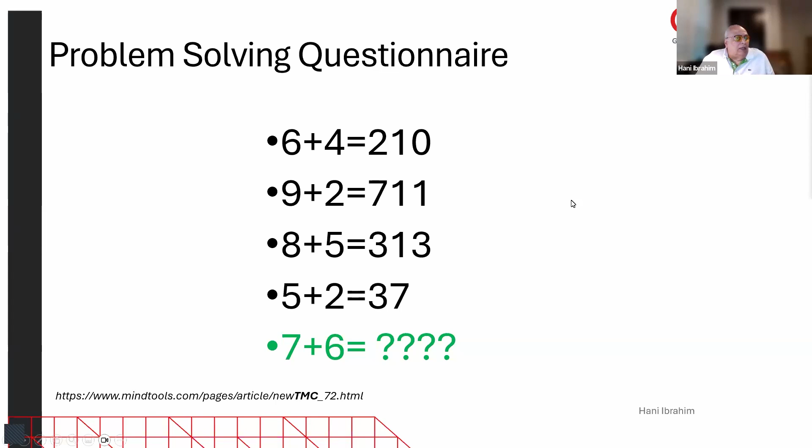So let's start with a bit of background on geothermal energy. Geothermal energy, as most of you know, is kind of married to the ring of fire, which is basically around all the continents, caused by plate movement and volcanoes in that area. So we have a few volcanoes and a few rifts between the continents, and that's where most of the hydrothermal wells originally started. You can find all of them on a web map, of course, but that's basically what it is.

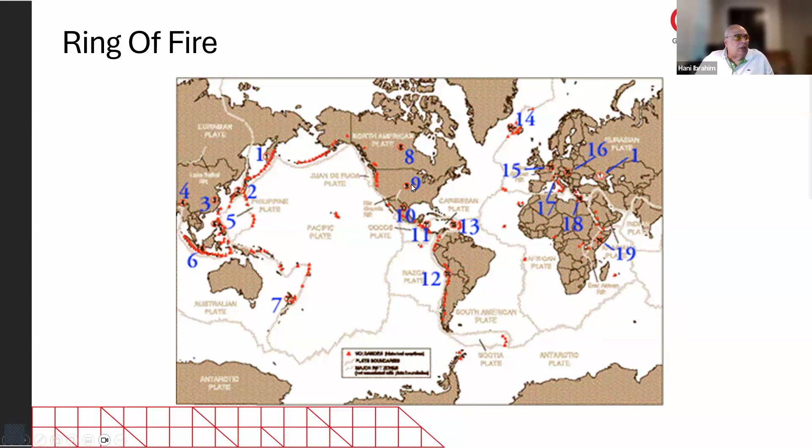Now, a group of people came up with this heat depth contour map, which is considered a new kind of concept for drilling geothermal wells, because, as we will discuss later on, we have new types called EGS and AGS and super hot rock and hot dry rock.

So they came up with this kind of heat map, saying that you can get 450 degrees C, and we'll talk later about why we're targeting that kind of temperature. This is above 800 degrees Fahrenheit. We can reach that temperature in places marked red here. So you can see a few of them, closer again to the volcanoes. At 5 to 7 kilometers, orange is a little bit more pronounced.

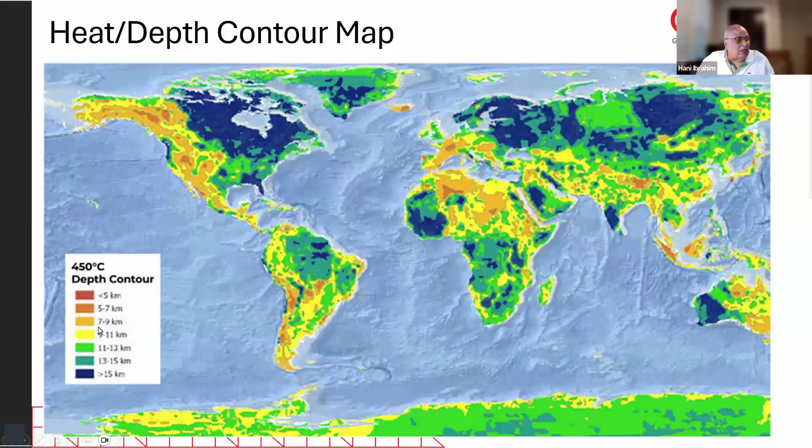And then at 7 to 9 kilometers, you find almost the west of the United States, west of Latin America, east of Latin America a little bit, the Middle East, Europe, Saudi of all places, and other places in India, Japan and Singapore. So what we're saying here is that we can reach that kind of temperature right now, but we don't have to reach 450 degrees. We can reach less than that at less depth. And this is 5 to 7 kilometers, which is about 15,000 to 20,000 feet.

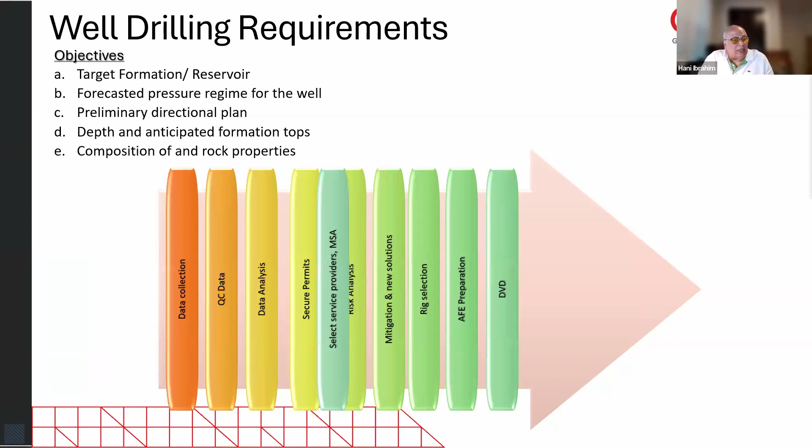So let's go back to the concept of well construction. What do you need from well construction? Well construction is complicated, and I'd like to give kudos to my friend John de Wardt, who started this idea that drilling is a system of systems, because everything is related to that system, and we need to look at everything we have. So we collect the data, and we have the formation. Then we study the data, QC it, analyze it, come up with the permit for the area, do the risk analysis meanwhile, and then look for any drilling issues you might see and how to mitigate them if you have new solutions.

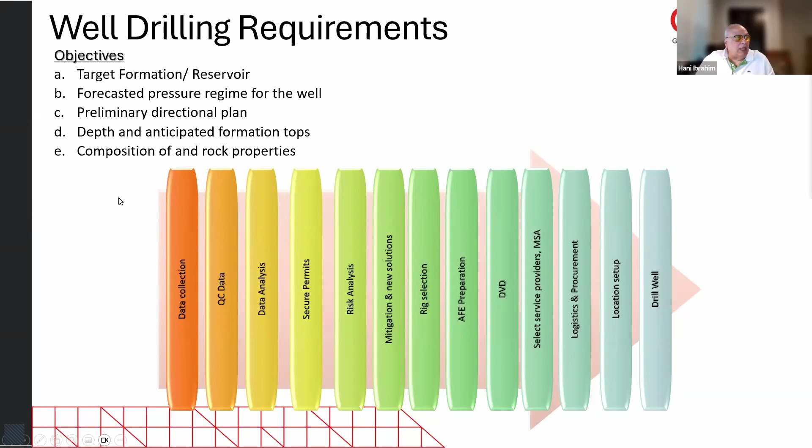Then we select the rig, we prepare the AFE, we prepare the drilling depth versus days. And then we select the service companies. We look into logistics and procurement, order our casing, our wellheads, and stuff like that. Then we look at the location, set it up, and start drilling the well. So it's not an easy task and it takes time, but before we start everything, we need to have the data. Data is important, and the geology is also important for us to know where we are.

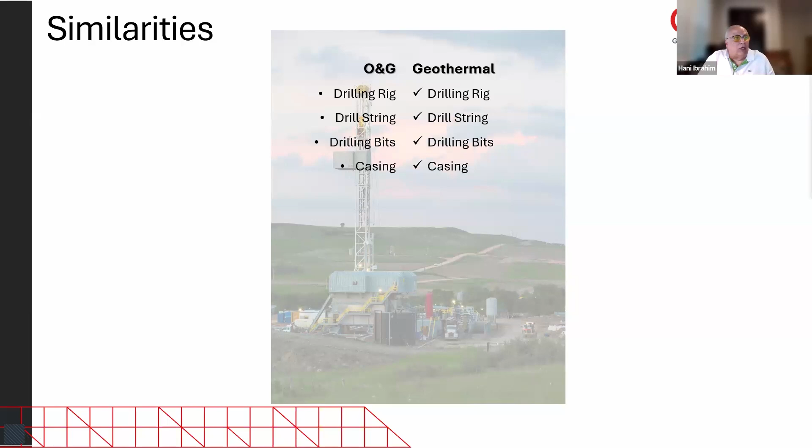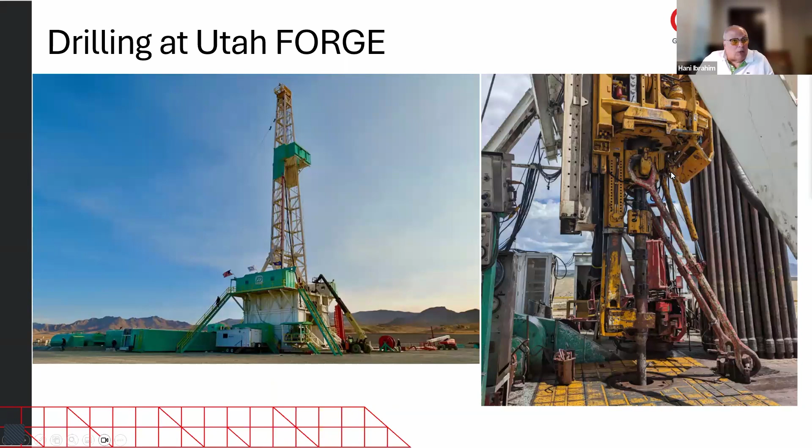You'll be surprised to see the similarities between the oil and gas industry and geothermal. Both use drilling rigs, drill string, bits, casing, etc. So you find a lot of similarities, and as proof of that, Utah FORGE, which is really a great testing ground for a lot of new technologies in geothermal, is using a regular rig, regular pipes, top drive, everything is the same.

Having said that, there are some dissimilarities or difficulties. Most of the drilling rigs right now in the States are catered to shale, unconventional. So they're reducing the size of the rigs and the number of rigs as well. But the capacity to run large casing deeper is one of the important parts of geothermal wells, because, as you will see later in the discussion, we need larger casing to produce more heat, and as such, you need to run that larger casing deeper.

So imagine if you run 9 5/8 casing, for instance, to about 15,000 feet. That's a lot of weight to carry by the mast, as well as the casing itself. It would be like 53.5 pounds per foot, which means a lot more than the regular capacity we have right now of 750 or so. I think it relates to about 1.2 million pounds to carry.

The casing itself needs a lot of looking at as well, because it's going to be deeper as we look into torque and drag. It's going to be exposed to high temperature for a longer time. There is a possibility of having H2S, there's a possibility of having CO2, and these basically cause corrosion and embrittlement to the steel.

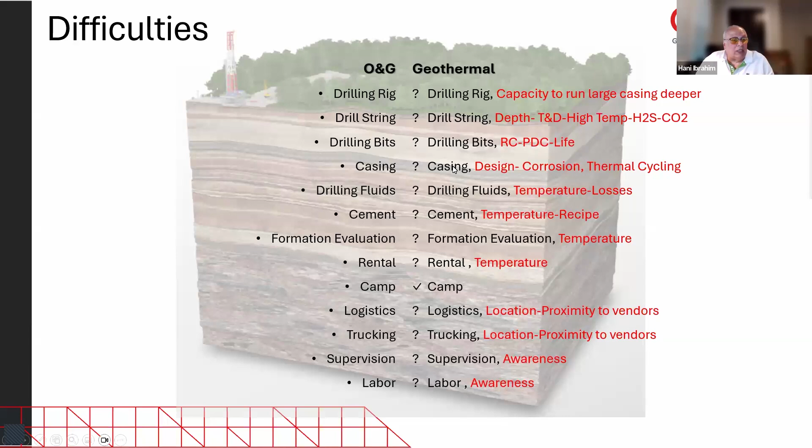And then supervision: a lot of people are not aware of geothermal wells and what kind of HSE issues they have. So you have to be aware of what they have in there.

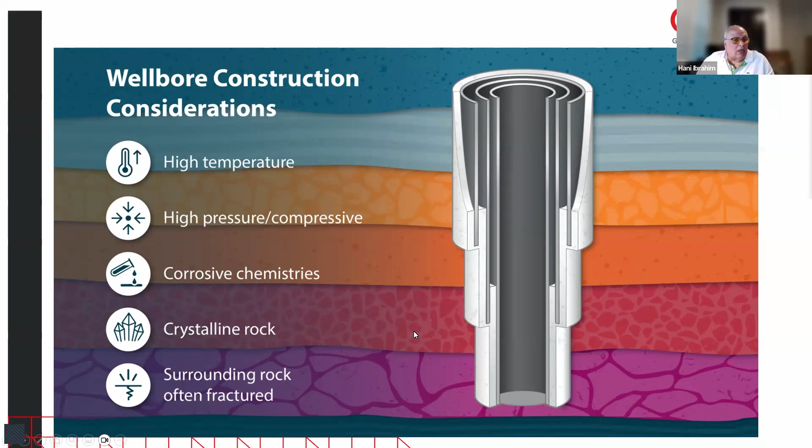So the considerations for well construction, basically, are the five main factors here: you're drilling in high temperatures; sometimes you have high pressure and compressive strength of the formation; there are corrosive liquids around; maybe crystalline rock, which is what we're mainly going to concentrate our efforts on, because you have granite or metamorphic rock, and it's hard to drill at a UCS of probably 50,000 psi or above; and then we have fractures included in the scheme of drilling the well.

So we have some learnings from the oil field which we can apply. Again, as my friend John was saying, it's a complicated system of systems. We need a holistic approach to any problem in the oil field, and the same for geothermal. We cannot think individually about what I can provide to the well construction if it's not affecting other people. Everything is affecting something else. So it's a domino effect, or a Jenga, if you like.

The reliability of the system, especially for EGS systems, which we're going to talk about a little more here, is dependent on consistent measurements. And measurements have been a bit hit and miss in the oil business as well. We don't have really accurate measurements for depth. We cannot really say where we are at the moment.

So it's all dependent on the rig and the measurements and the steel measurements, if you know that. And basically, we don't have a sensor. In the end, the sensor itself is going to be affected by the temperature, so we need to be careful about that.

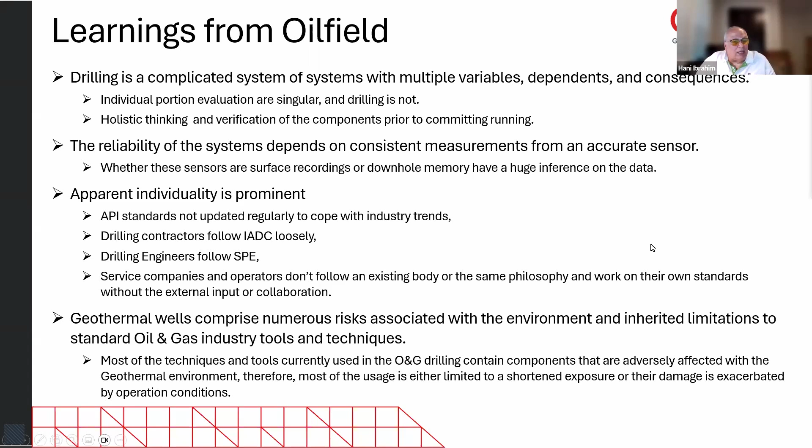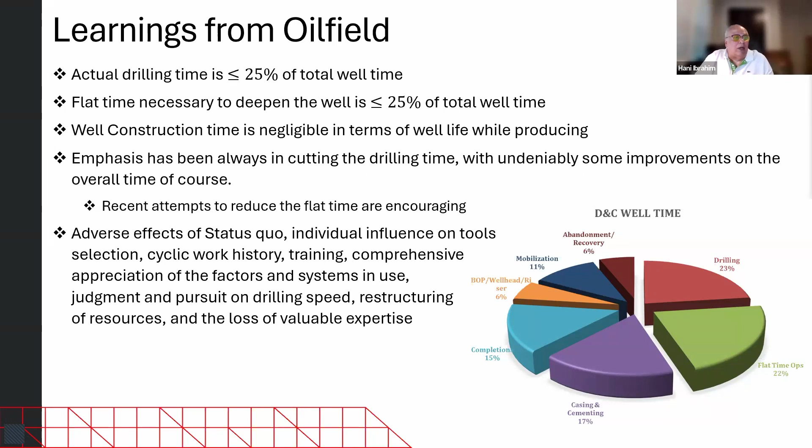But we have some kind of problems, when the tools provided in the oil and gas fields are concentrating on the oil and gas solutions and the environment they run in. And as such, we don't have exposure over to the geothermal world.

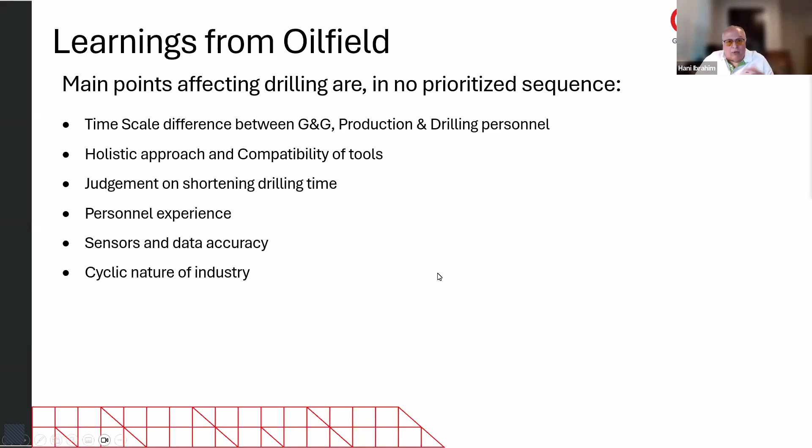Again, the sequence in oil and gas: the G&G guys are talking in centuries and eras and stuff like that. Production is looking at maybe 20 years of production life. Drilling people want to have things per day. I think we found out that if we don't really have a holistic approach to have the tools working with everything else, going back to the system of systems and the effect on everybody else, that is really essential and crucial in the success of drilling geothermal wells, and whatever learning we got from the oil field can still be valid in the geothermal field as well.

So we have some conceptions for the transition to the future. We need to accept a higher state of risk because of the temperature. Temperature is our frenemy, as I like to call it. It's our friend and it's our enemy at the same time. At a certain level, you cannot run tools, you cannot run things you want to run in a well because you're limited to the temperature envelope of that tool. However, as you can see later on here, the higher the temperature, the better the return on your investment. So we'd like to operate in a higher temperature environment.

Planning is really important because you need to know exactly where you're going for the tools. Identify the performance from the past wells, bring in some new equipment or adapt some of the existing equipment to try to work in that kind of extreme environment. It's kind of expensive if you really follow some of the practices you had in the past without really thinking about the heat or the component of the well, which is basically the rock, very hard rock to drill. I think we need a lot of brain power and input on the mitigation of all the problems that we might have. Again, the damage is happening because of a few things: temperature to start with, formation strength, and abrasiveness of the granite and basalt.

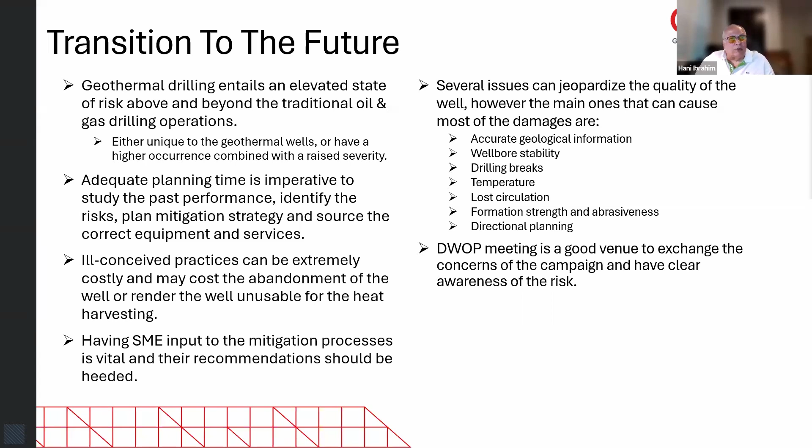So I think just following again the oil and gas, the DWOP or drilling well on paper is a very good practice to bring everybody together, all the stakeholders, to really look at things from their own perspective and share that with everybody at the same time. There is a critical path on what we need right now, because sometimes you need this information, or you need this tool right away to improve the performance, but also show that the performance is replicated and can be dependable in creating future wells.

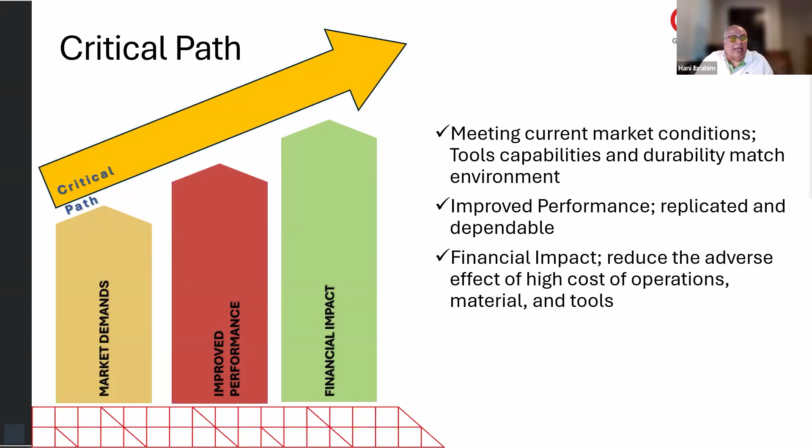But also in the meantime, we would like to have the geothermal industry attractive to the financial world, so they can invest more and more into geothermal and reach a level of investment like the oil and gas have, or enjoy, should I say.

So looking back at the oil and gas as well, we have oil rigs here. This is from 2000 to the year 2015. You look at the number of rigs here. It's below the 500 level until you reach '08, and then started higher and higher to about 1,500 rigs in 2014 or 2015, and then started to drop again. Was that a bad thing or a good thing? We'll see what we have here in a minute.

But I think we have all the involvement and innovation from the service companies and from the rig contractors, so that we have more robust tools that drill further and faster. We have rig automation. Connection time is shortened, handling after connections and after trips. Maintenance is automated on the rigs now, so that really minimizes the NPT for rig repairs and all that stuff.

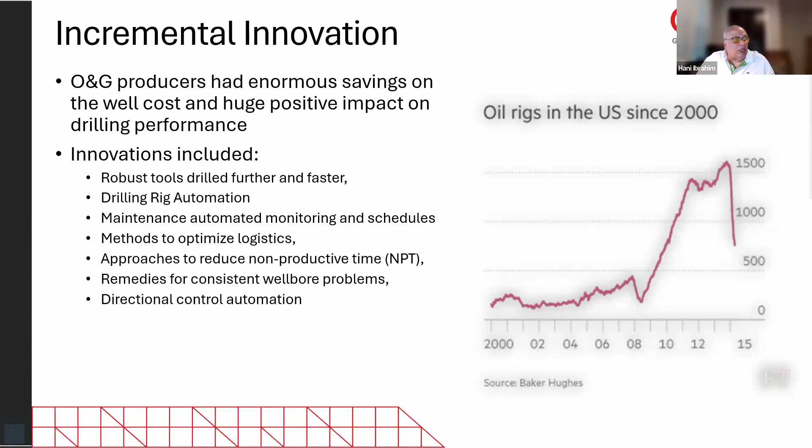We have a lot more remedies for correcting well problems. We have directional control in the rigs now, and automation and remote sensors and everything. So that helps us a lot. And basically what we see here, I gathered this data from the rigs. So you can see this is the wells per rig. And you can see even with a slowdown in the rig count, the number of wells per rig is increasing. So the rigs are drilling well.

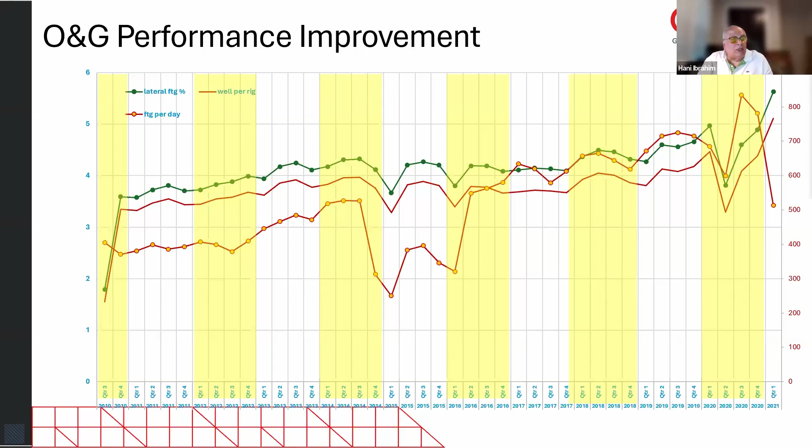Then the footage per day and the lateral footage in particular are increasing in general. That tells us a few things here. That tells us basically we have better tools. We drill more factory-like wells, if you like, and you get that into a standard optimization system. So you improve and you carry on improving every time you do the well.

But I'm trying to offer you something new here a little bit. The Stone Age invented the wheel. This luggage carrier was invented in the 18th century. It took about 19 centuries to come up with a suitcase or bag on wheels. And everybody's using that now, and nobody thinks about it. The wheel was invented 3500 years BC, and this in the 18th century. How come nobody thought about this?

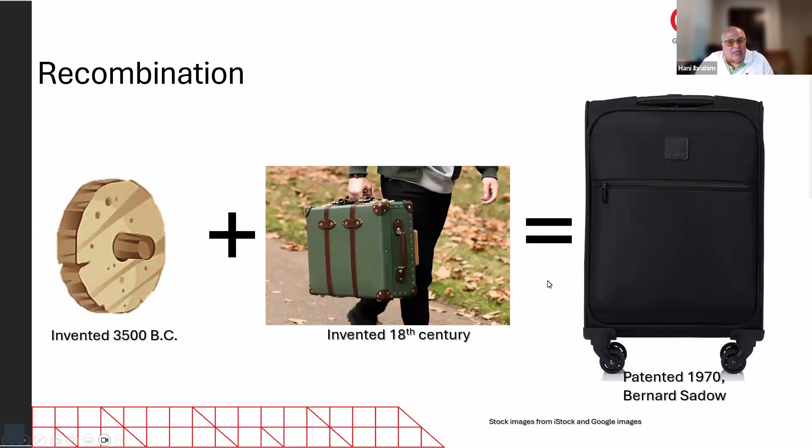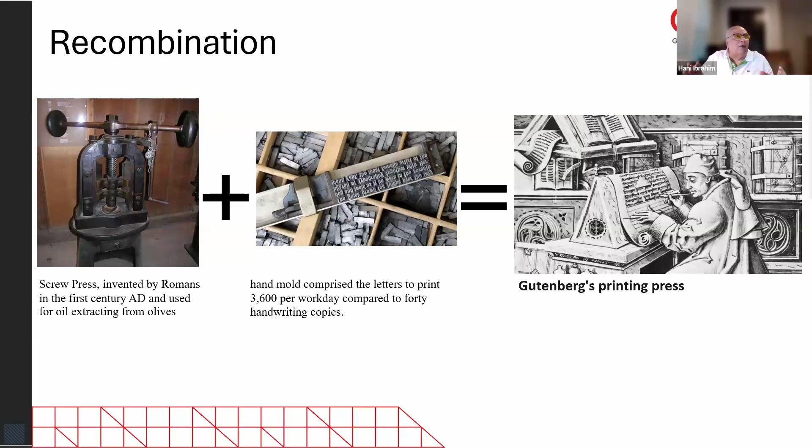This is what we call recombination. I think it's a great idea to have that in our thinking. Another example is the Gutenberg press. It took some time. A very long time ago we had this mold holding the letters that led to the printing press of Gutenberg, which nobody now looks at as something weird or different, but it's all recombination. So what I'm preaching here is trying to get everybody to use an idea from another field or another world, and combine it with what we have here to come up with a good solution for geothermal wells.

So, as I said, we have a few geothermal well types, if you like. The older types were, as an example, in The Geysers here in the western USA. Basically, these are what we call hydrothermal wells. So you drill the well to an aquifer, and once you reach that aquifer, you set a liner, a slotted liner in most cases, and produce from that. And it depends on the quantity of water, or steam, still in that aquifer. And typically they have higher temperatures, 400 degrees Celsius or so.

So it's a really good kind of investment in power generation. However, again, it depends on the size of the water aquifer, how much we have in there. And they've been trying to improve that quality, if the wells drop down or the water content drops down, by drilling some wells here and injecting water into these. So there comes that injection water here. And basically you get the heat out and you turn a turbine, and that will give you the traditional

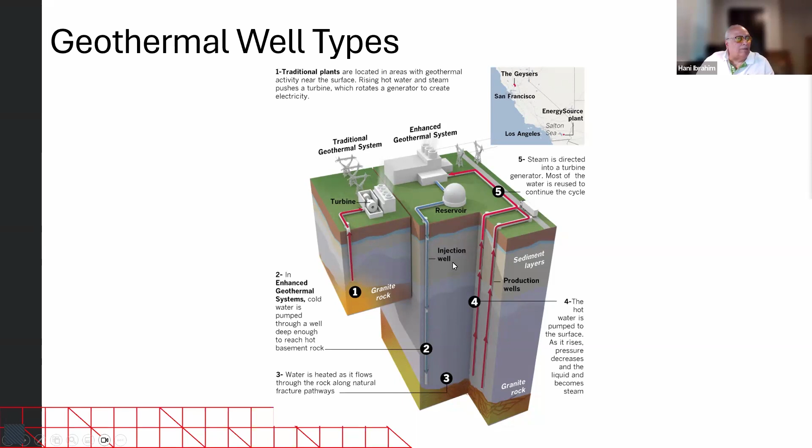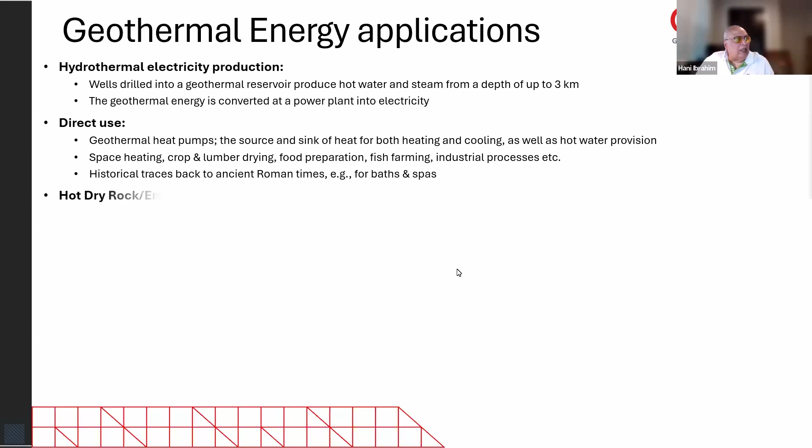So having said that, we have kind of categorized the geothermal applications. As we said, there is hydrothermal, which is the traditional conventional way it used to be in the past. The direct use, which is basically in Europe more than here. We have a lot of space heating and kind of working with that. Japan as well has a lot of hot spas and stuff like that, which they really like and keep. The last three ones here are really new types.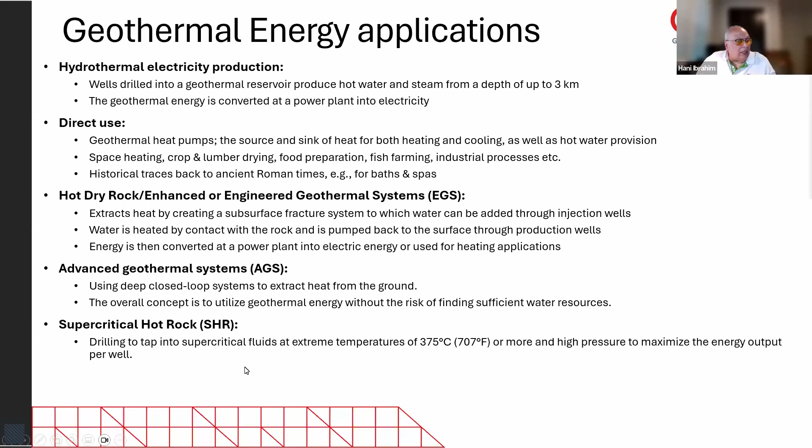So we're talking about the hot dry rock enhanced engineered geothermal, what we call EGS. So basically, as I said, pumping into a subsurface fracture system without having the aquifer in there, and you heat the water by contact with the rock, and then pump it back to the surface. The AGS, as I said, uses the single monobore to basically pump water outside the tubing and retrieve the heat inside the insulated tubing. And then the top part here is the supercritical hot rock, which we call SHR, and the temperature in these is above 375 Celsius, or 700 degrees Fahrenheit.

So why are we going for the high temperature? We're going for the high temperature because basically, when you see this curve here, these are the production per well. And you see the LCOE, which is basically levelized cost of electricity or energy, is dropping down fast with the amount of production from the well. So if you produce about 30 megawatts per well, that will give you less than $30 per megawatt production, which again is where the profit comes from.

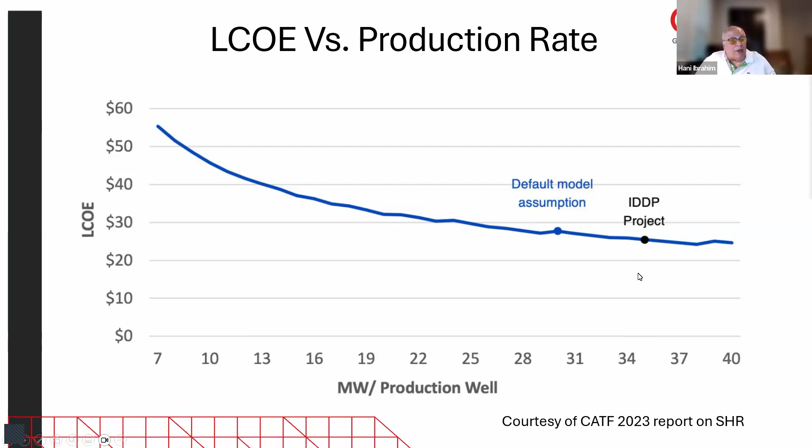The IDDP project in Iceland actually reached about 25, and the production was high, about 35 or 36 megawatts per well. So the amount of production coming from that is a better way to produce and to get return on your money.

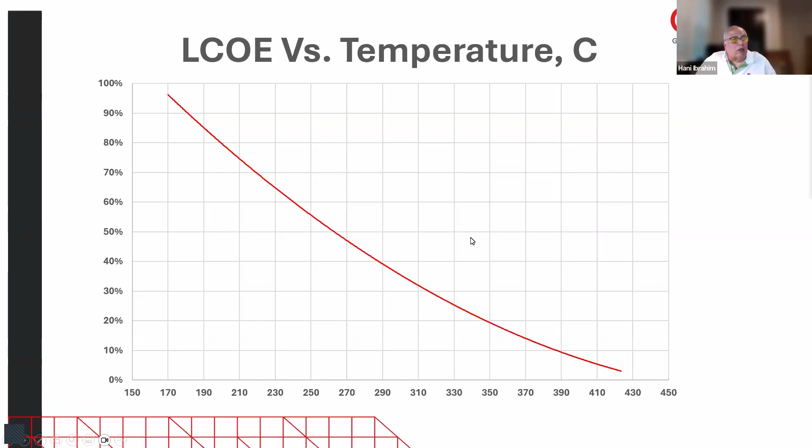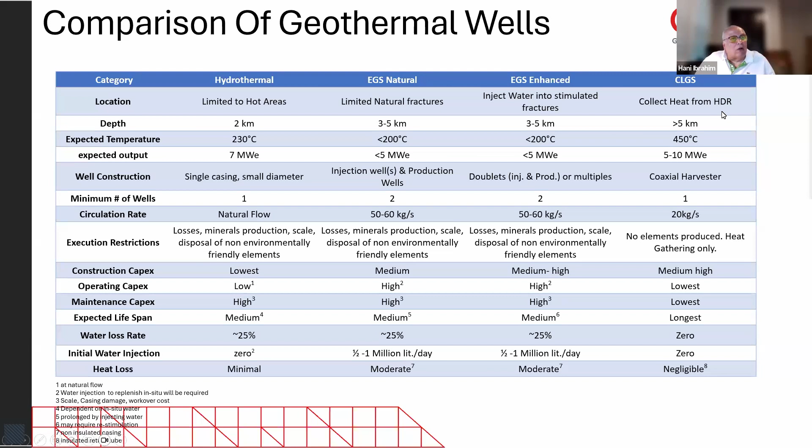So that's why we're going for the hotter rock or the deeper wells. This is a busy slide, I don't want to read it all, but I'm trying to show you the different types of geothermal wells here. There's hydrothermal, which we talked about, the EGS natural, and the EGS enhanced, which pushes water from outside and tries to fracture the rock, stimulated fractures. EGS natural would be limited natural fractures already existing in the rock, in hot areas where you have a hot aquifer. The closed loop collects heat from HDR, hot dry rock, or super hot rock.

So looking at the rock EGS, you're looking at creating a fracture network down there. That fracture network can be mostly natural fractures, or stimulated fractures. The idea here is to pump cold water or a working fluid down. Some people are using supercritical CO2 to do that, pumping through this open fracture system. That open fracture system gains heat from the rock and then goes back up to the second well, or production well, and then basically you have your power plant on top.

Some of the concepts involve stimulation of the rock, which basically means hydraulic fracturing. As such, we have seismic monitoring on most of the wells, just to try to see what kind of seismic events may happen while stimulating the well.

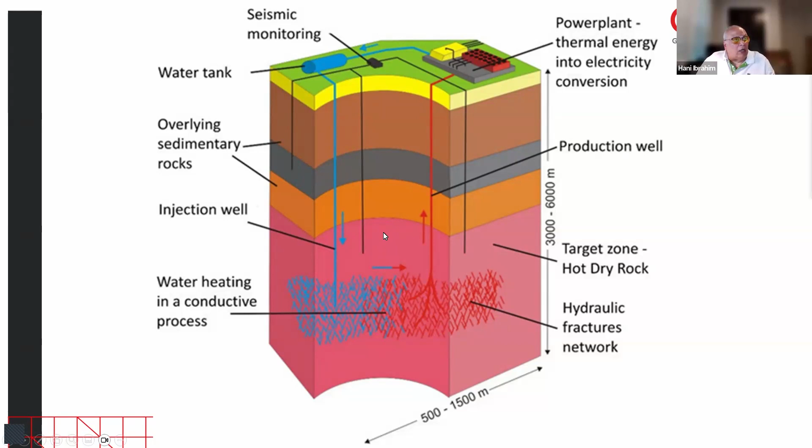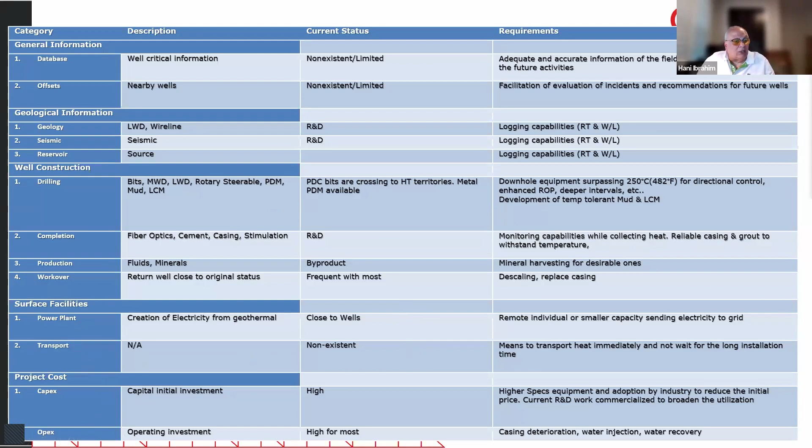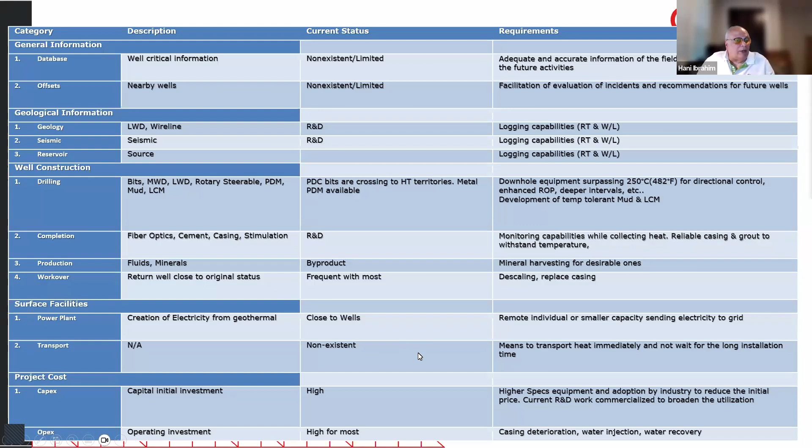Since this is a drilling discussion, I'm going to concentrate a bit on the drilling aspect. But there's a lot more here, because the power plant itself costs money. Transporting the heat is really non-existent at this time, because we cannot transfer heat via pipelines or anything available for oil and gas at the moment, and that creates a lot of problems. So that means you have to have the power plant close to the wells, and that's another area we need to explore to come up with a better plan.

So there's some development, some people trying to work on developing new ideas and concepts, and I'm going to share some with you. But before we do that, let's look at the geothermal focus really. We're all talking about this thin crust on top of the earth, we're not really going that deep.

Some wells have gone as deep as, I think this is the longest I could find, about 12 kilometers - the Kola Superdeep. I believe it was in the Russian Federation, and the KTB in Germany, about 9 kilometers - these are as deep as possible.

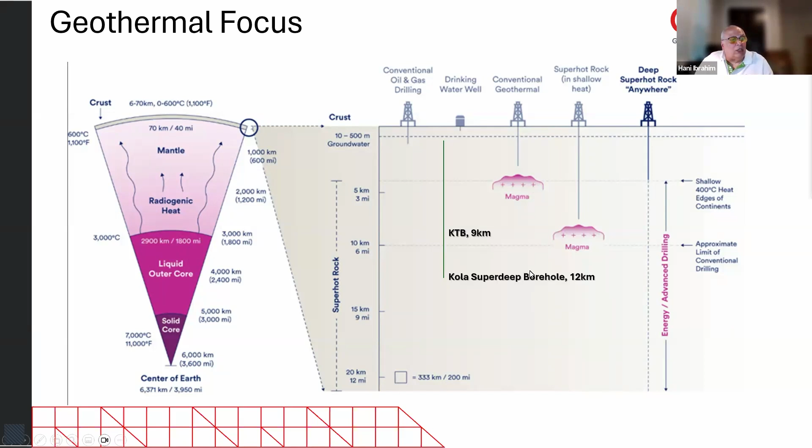But in order to reach really deep and get that heat from the liquid core, wherever it comes up, you're looking at wells drilling close to any magma, interrupting the mantle and going into the crust, getting closer to the crust, which basically means closer to a volcano to get that. So you're looking at wells drilled conventionally here. Super hot rock is basically trying to reach there, but to get really, really deep super hot rock anywhere, as per the map we just saw, we need tools and things to go beyond that.

One of them is the drill bit, of course. Everything hangs on a drill bit, since it's the first thing that meets the rock, or rubber meets the road, if you like. So we're looking at some people who have done a lot of work on the cutter types and the cutter shapes.

That way we can increase the weight on bit to drill through the granite and the high formations, high compressive strength formations we encounter while drilling in oil and gas. So that is important for us, but also what's important is the torque stability because we have a lot more vibration while drilling hard rock, of course.

The temperature, because while you're drilling, you're generating a lot of temperature at the localized contact between the cutters and the rock, but also you have hot temperature coming from the rock itself, so we have to compensate for that, and you have to cool the well and cool the bit, especially to get a higher penetration rate.

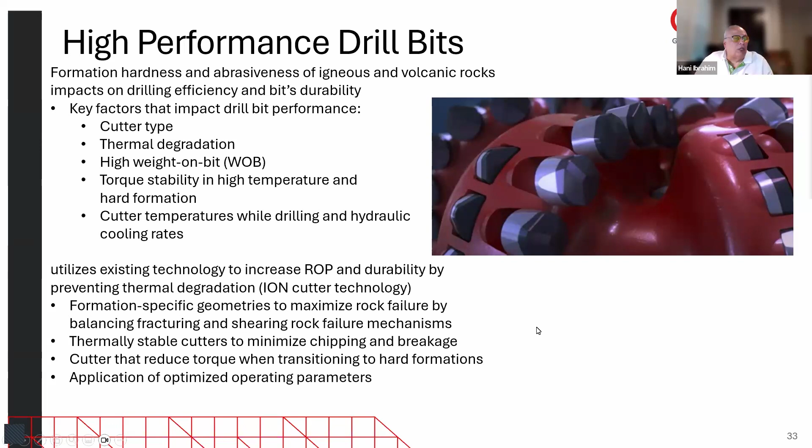And that's kind of what we're preaching here, not to do that. So it's a little bit of a change in mentality on how to approach the drilling of these hot rocks. This has been applied, and all these learnings are gonna turn out to be a great thing.

If you look at this Forge well, we drilled the previous well that was drilled so many years ago. This 16A was drilled about 3 years ago, and you have the record run for it. Basically, it's 742 feet for the bit, which, when you talk about oil and gas, is basically nothing. We're looking at 4,000 or 5,000 feet runs here.

But they have changed the drilling practices a little bit. We changed the weight on bit, the way we apply it. We have shaped cutters. They perform drill off tests to find out what's the right parameter to do this. These are the two important things here in my mind.

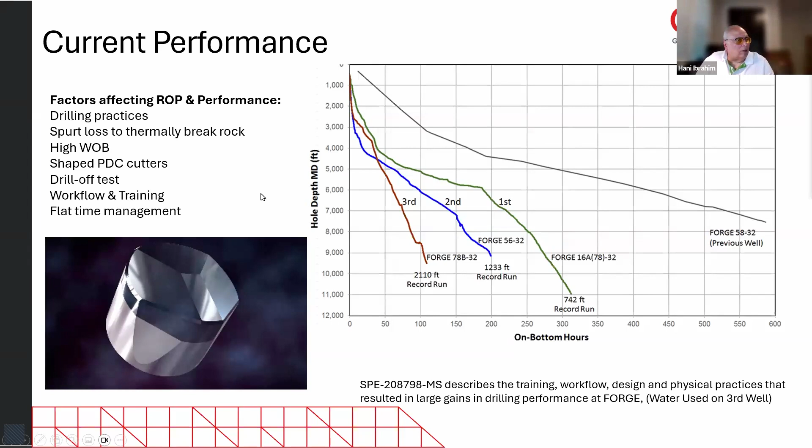So PDMs are another important part as well. The normal PDM has a lot of rubber lining on the stator and on the rotor, and basically that deteriorates with temperature, to say the least, but it also cannot handle all that. Even if you have the higher component of rubber or elastomer in there, I think it's HNBR they're using right now, that's a maximum of 175 degrees Celsius it can handle. And if we're looking at anything above 200 degrees Celsius, this is not applicable. It will chunk on you.

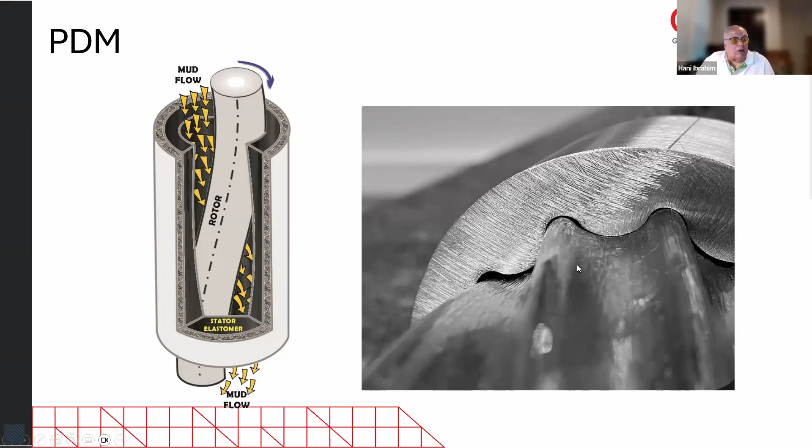So another approach was to use metal-to-metal motors. Metal motors, as you can see here, have no rubber components at all. So as such, they have the capability of running longer without having any issues for rubber deterioration. However, because of the close tolerance, you have to run very clean mud through this. So it's expected to have top-of-the-line mud cleaners and all the solids control equipment to help run a very clean mud so as not to affect this tight tolerance for the PDM.

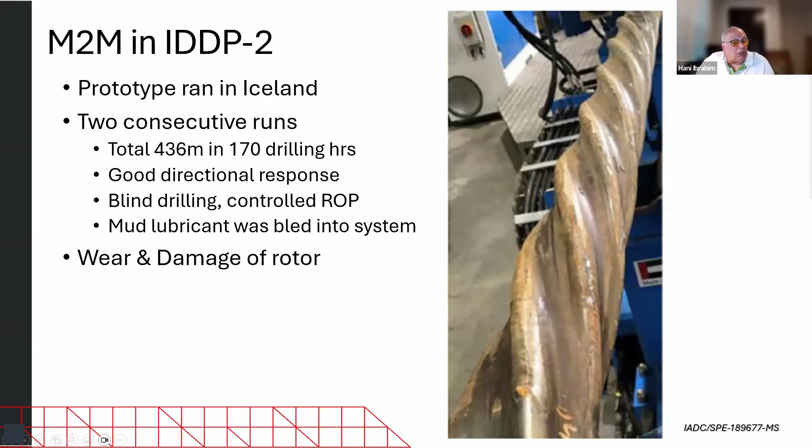So we have run the metal-to-metal motors in IDDP-2, which is the Iceland project here. And basically you can see on the rotor there's a lot of damage on the rotor here. You can see it visibly by your hand, and you can refer to it in this SPE paper as well.

Drilling fluids is really the bloodline of any drilling operation, and you have to have a good drilling fluid to counter a lot of the stuff we see in drilling regularly in oil and gas. However, because of the geothermal system requirements and limitations, we basically run aqueous fluids, which is basically water with minimum bentonite and gels. There's a lot of research going on to try to use new materials, but the thermal stability of most additives and chemicals is less than the required temperature of about 400 degrees Celsius. So we're still working with water-based mud. We still don't have any kind of solution for that for the time being.

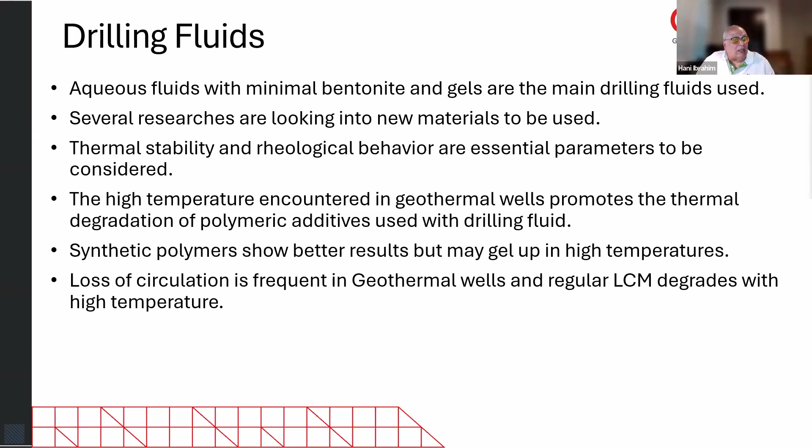There's lots of lost circulation in some geothermal wells. It's frequent, as I said. And basically, the regular LCM material degrades with high temperature. So we need to look at a good solution for that. So far, what we've been using is drilling, then cementing that zone, that thief zone, and then moving on afterwards.

Which brings us to cement, and cement is also a very important component in this equation. Portland cement and silica flour are traditionally used in high temperature wells for oil and gas, but they cannot really work well in geothermal wells because we have a lot of heat cycling between the setting of the casing and the cementing, and the water around it. Basically it deteriorates the cement to a point where you cannot really use it for anything, for the zonal isolation you're looking for.

So typically what we have right now is to add more retarders and friction reducers to offset the high temperature, or use a brand new type, calcium aluminate phosphate, or thermal shock resistant cement, TSRC. These are still a little commercial. We have some other types available commercially, but mostly it's lab testing from the national labs we have.

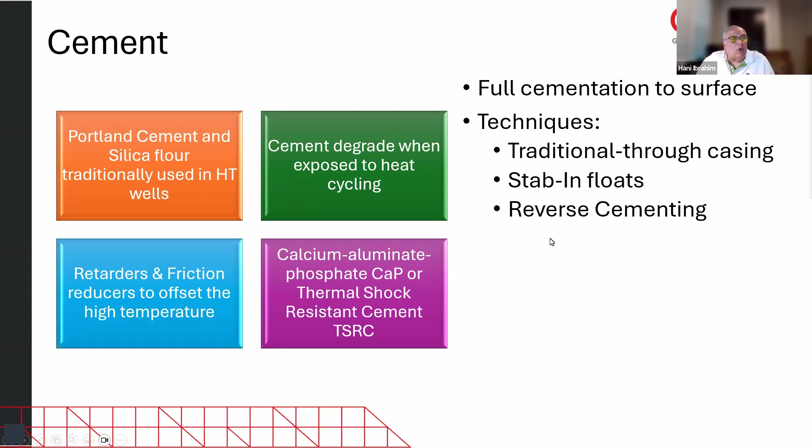MWD, we mentioned that the new EGS wells are going to be drilled with directional work. So this directional work is really important, and as such you need to know where you are, as far as measurements for the well, direction, and other things.

Formation and orientation, vibration - the MWD we currently have is basically 175 degrees Celsius maximum. Some vendors are looking at changing things. So what they wanted to do is an enclosed or encapsulated MWD component and have a nice way to cool the tool down inside that encapsulated equipment.

Which is called the Dewar vessel. So they go through this factor here: when they start with 300 degrees, they control a valve and it evaporates, getting a lot of zeolite in a system to cool it down, just like your AC. If you think about it, like your AC at home, it runs a refrigerant to really cool the area around you, and this is basically what it is.

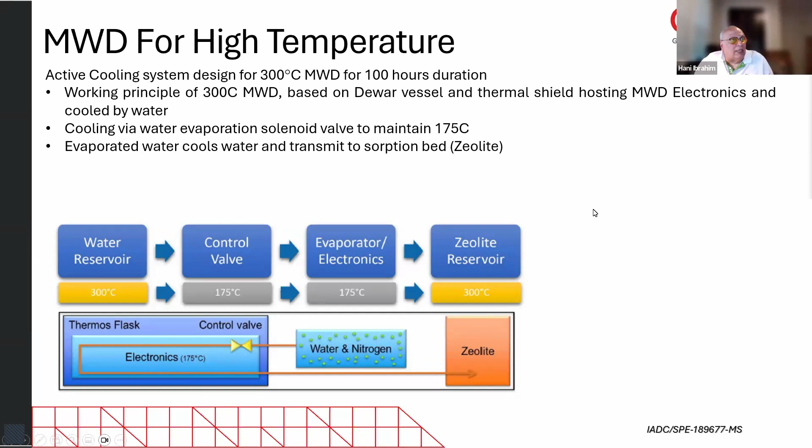It's kind of a reservoir that impulses things into the thermos flask, and then the zeolite cools down the electronics and maintains the 175 C temperature, which is the maximum for these electronics. You can read all about it in this SPE paper here. However, unfortunately, this has not been used at all - it's been shelved and I think discarded afterwards.

So in conclusion, what we're looking at here, what we need to do to drill into the 350 degrees C or more: we need an AC rig with a hoisting capacity above 1,000,000 pounds to manage the heavy casing. We need high temperature BOPs - something we didn't talk about, but all the elastomers in BOPs are rated for 300 Fahrenheit only, so 150 degrees Celsius.

We need corrosion resistant casing. Perhaps we don't need to go to exotic materials like titanium and molybdenum, but we can use something else with modification. We need high temperature drilling fluids. We need high temperature MWD and LWD to help us locate where we are and really explore this EGS system as much as we can.

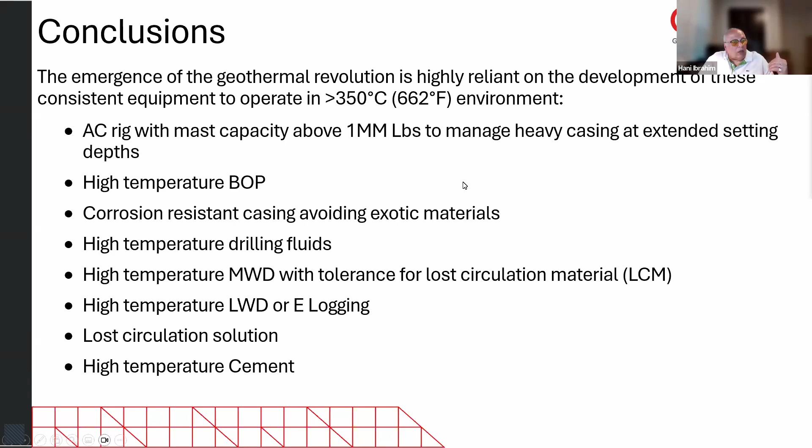Lost circulation is an issue, and cement is an issue of course. So we need to sort all this out to be able to get into really the geothermal kind of performance that we're looking at from oil and gas.

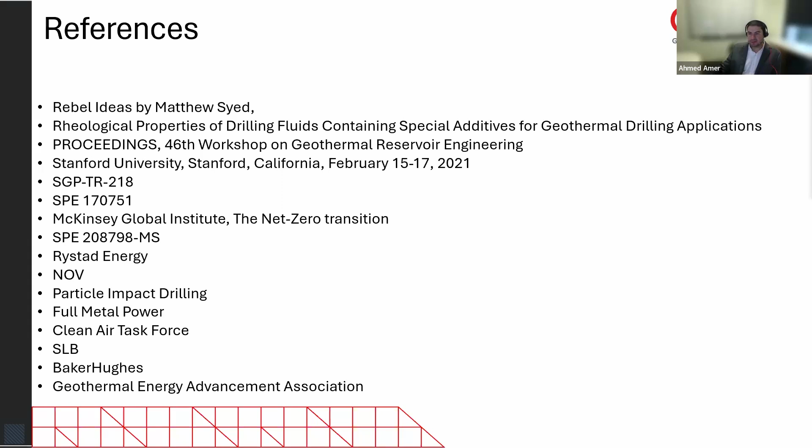All right. So there is another question. It's talking about the wells that have been drilled in Iceland and Japan, with temperatures exceeding 500 degrees Celsius. And what's the difference in methodology there versus what you're looking at? Well, the wells drilled in Japan to about 500 degrees Celsius took over 500 days to drill. So in looking at the cost versus value, you're trying to look into something equitable, right? So you cannot really use the same concept they have. This has been a really long well to drill, because of the time it took them to run this MWD and pull it out after every run. So that took a long time, of course. And then they burned a few MWDs, should I say. And that again, we're looking at cost.

Same thing goes for the IDDP in Iceland. They really drilled the wells deeper, but again, they cooled the well, but they managed to lose a few things, as you can see from the design, around some of the PDMs they use and stuff like that. So very important things. I think what we missed talking about here is how to cool the mud while drilling, and the use of mud coolers or chillers is a good practice to have as well, and coated pipes as well. That's other things that we're looking at at the moment.